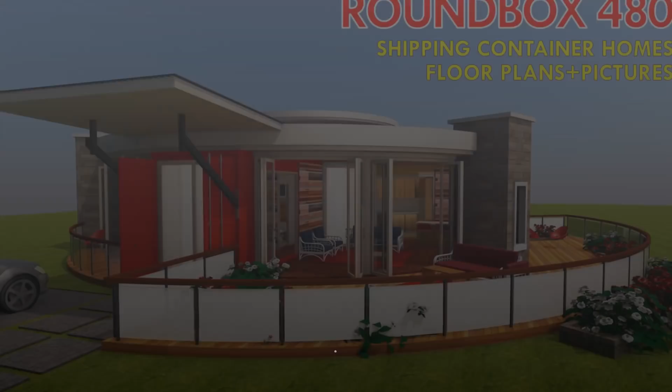This video brings to you Roundbox 480. Stay tuned to find out how a box can be round.

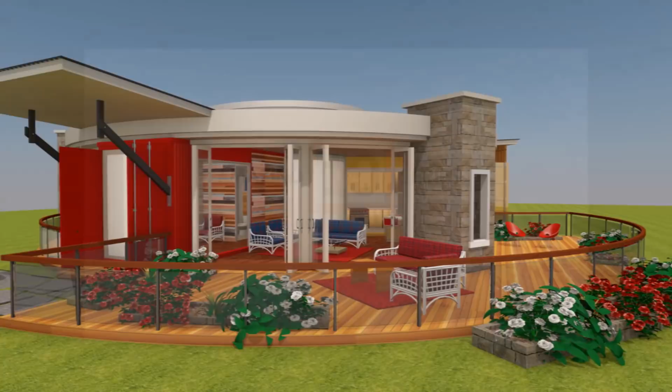Good, welcome back. So, Roundbox 480 is a modern shipping container house designed using three 20-foot shipping containers to create a 480 plus square feet house.

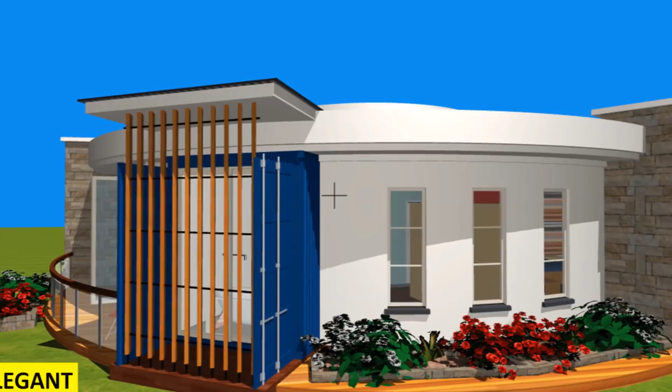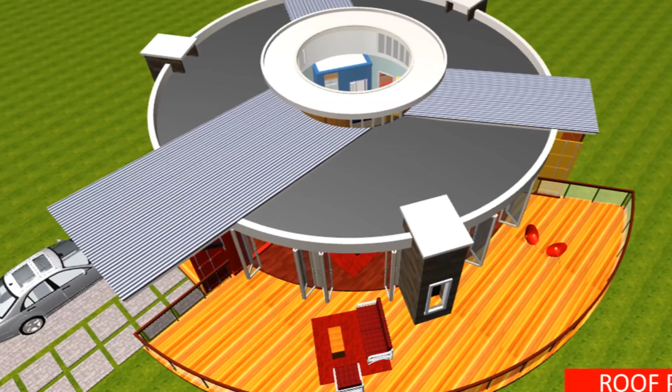So this video covers a complete presentation of dimension drawings, a cost estimate checklist, and 3D floor plans in full color that you can use for your own shipping container house project. Watch to the end of the video for you to be able to have a glimpse at the floor plans with dimensions and also a cost estimate checklist that can guide you in your own shipping container house project.

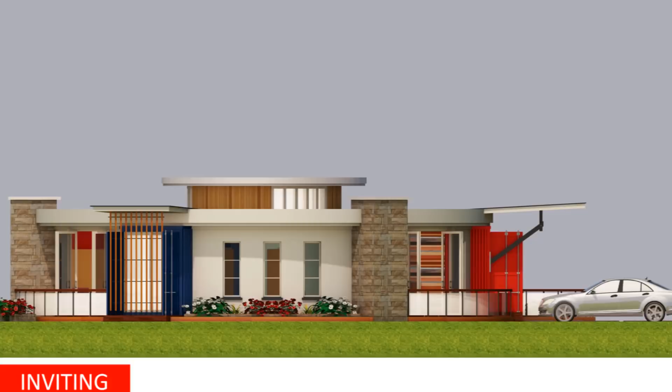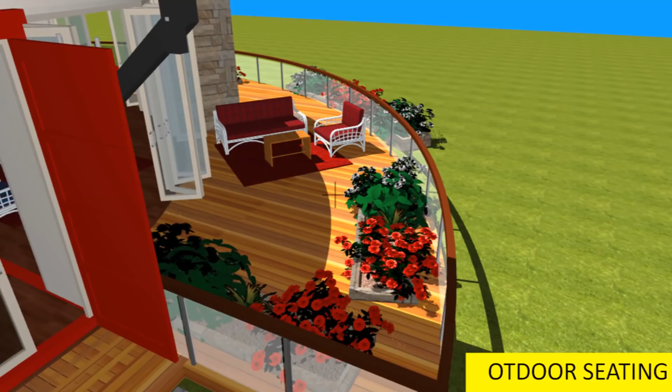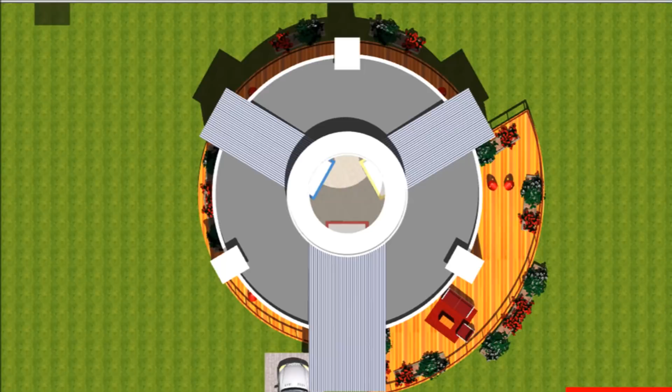So to start us off, we look at the design concept. As I had indicated earlier, this is a shipping container house designed using three 20-foot shipping containers that have been placed at splayed angles and rotated at 60 degrees to create three building blocks for this particular house.

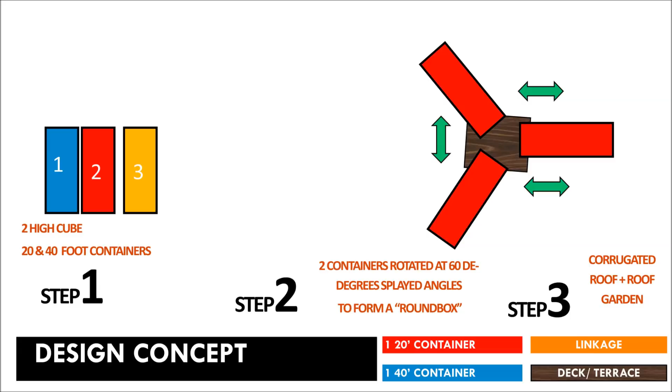Once the three shipping containers are in place, the remaining spaces in the three openings that have been created by this particular arrangement are enclosed with a suitable material to create extra space for the living room and the bedrooms respectively. The shipping containers act as the building blocks for this particular house, and they also act as spaces for the utility functions of the house.

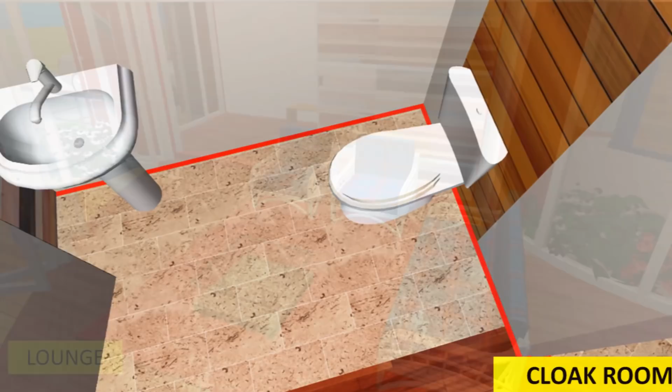So next we move to the design brief. The salient features we managed to accommodate in this particular house include: we have an entrance lobby which is in one of the shipping containers. The same shipping container also accommodates the cloakroom. From there you are able to access the living room. We have the lounge, the dining, and then we have the kitchen, the laundry, and the yard in the second shipping container.

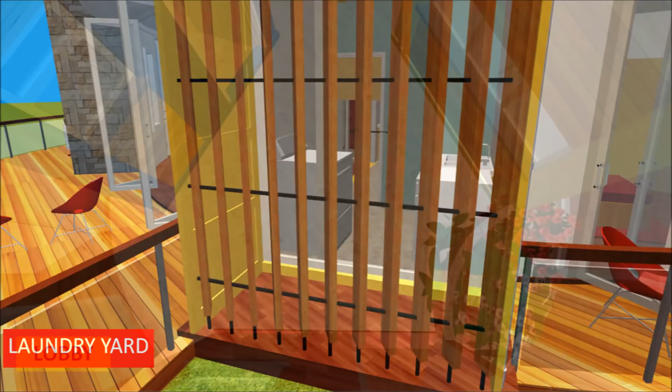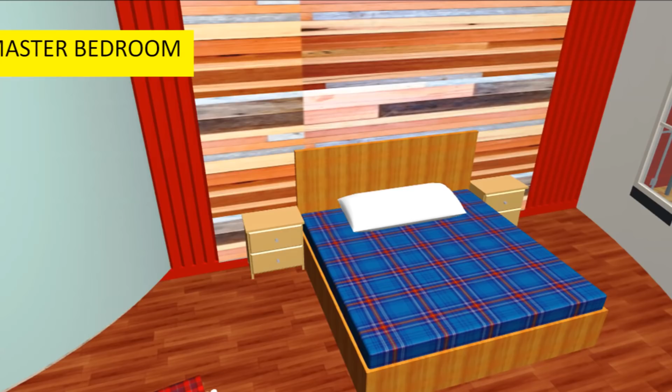From there you are able to access a central lobby, and this is to me the most exciting space in this particular arrangement. From the lobby you are able to access the guest bedroom and the children's bedroom. From there too, you should be able to access the common bathroom that is shared between those two bedrooms. Lastly, you are able to access the master bedroom, which is ensuite with a walk-in closet.

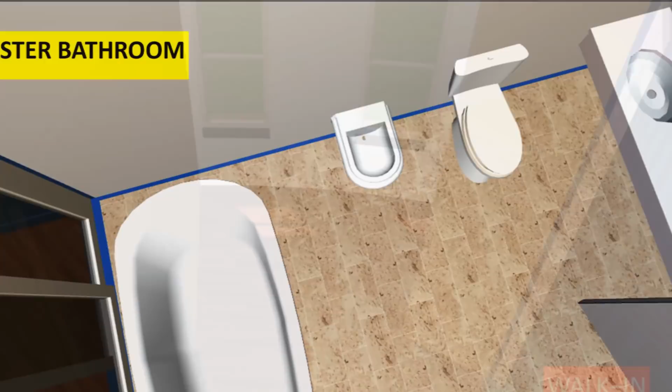So from there you can see that we've managed to accommodate all the utilities in the shipping containers, and the additional spaces around the shipping containers have been carved out to form a round shape, hence the name Roundbox. Otherwise, I know you should be wondering, how can a box be round? So this is basically the genesis of our title of Roundbox 480.

Next, we move to what I would call the foundation design. For this particular house, we've used a raft foundation. This is a foundation whereby you just create a slab and lift it off from the subgrade to keep off surface runoff and also improve drainage around your house, and then you just place the shipping containers on top of that slab once it has cured and dried.

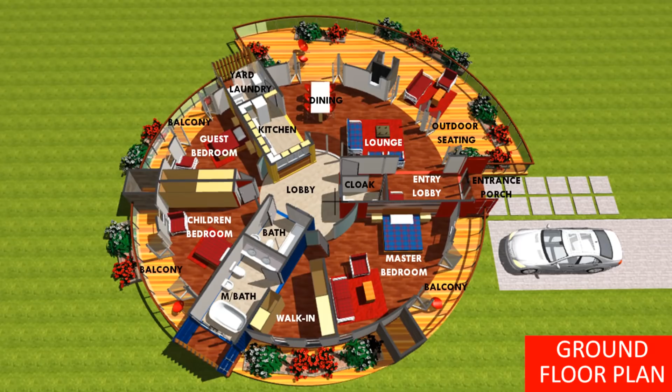Next, we move to what I would call interior design. On the interior design, we've adopted a minimalist interior whereby we use very little furniture as much as possible to avoid cluttering the space with unnecessary items. Try using multifunctional transformative furniture whereby you can have foldable chairs for the dining space, which can also double up as a study space.

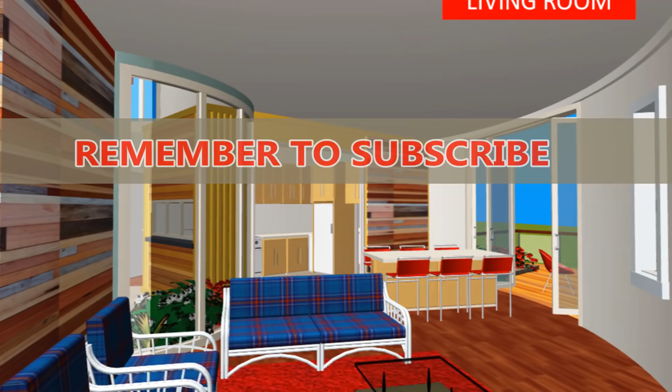You can also have Murphy beds or wall beds for the bedrooms, which can double up as children's playrooms during the day and a bed space at night, or an office space during the day and a bed space at night. Use light colored finishes for the interior walling and also for the ceiling, so that you can create that feel of a big space, despite the fact that the shipping container modules can be constricting owing to their small dimensions.

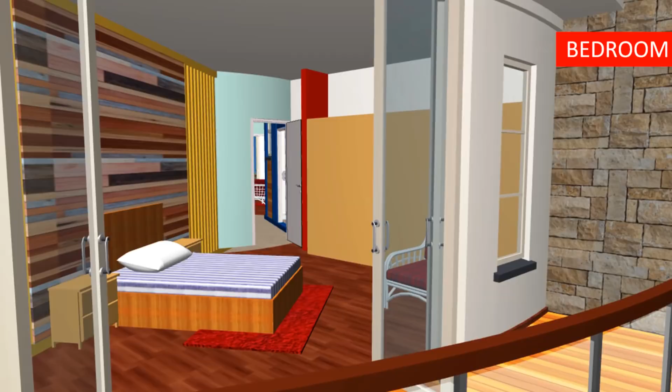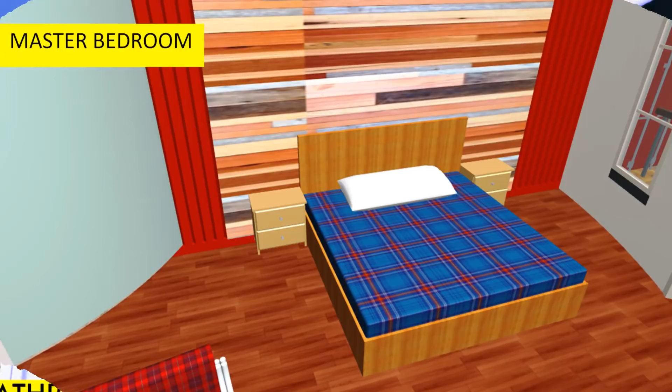You can also use flat pack cabinets for the kitchen and also for the wardrobe. They are good because they save you time, and also they are easy to install. Therefore, they also save you labor costs for your project. Use similar materials for the kitchen backsplash and also for the bathrooms, so that you can tie up all the wet areas and create some harmony and uniformity within the house.

So you can also try out sustainable materials like bamboo for the floor and also for the ceiling, and also in areas where you've done paneling, they can also act as a final finish or cover for that particular space, especially for the walls.

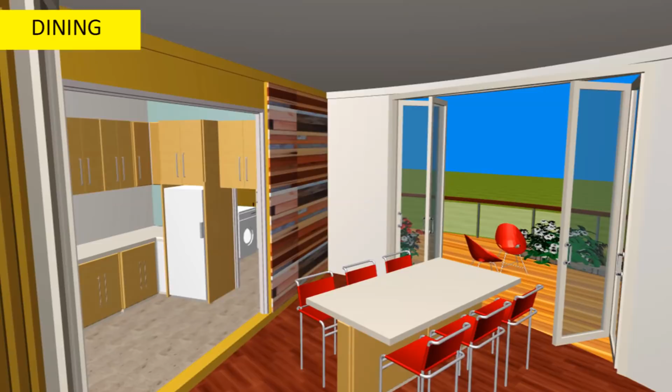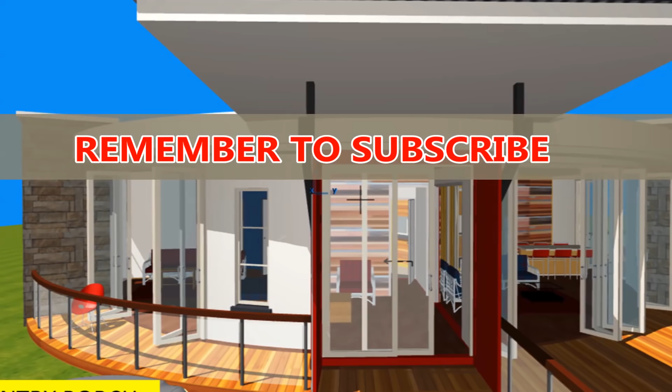You should encourage adequate daylighting so that you can reduce the amount you use for energy in terms of lighting costs. So in this particular design, we've retained all the shipping container end doors, and we've managed to fit them with full height sliding doors, and also we have foldable full height glazed doors for the living room and also for the bedrooms, to enable you to access the balcony spaces and also to adequately light up those spaces.

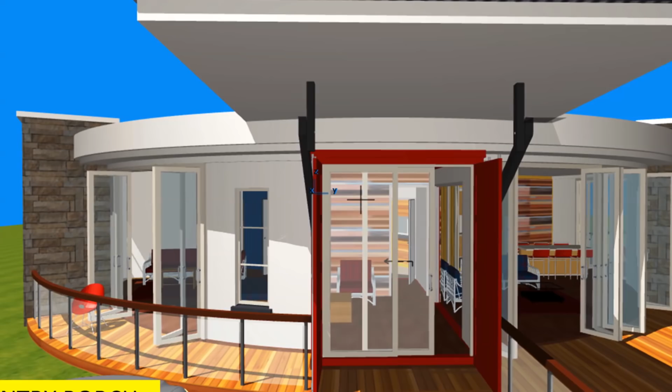Next we move to what I would call structure and modifications. Basically, these containers have almost zero modifications apart from the fenestrations for the bathroom windows and also for the access doors to the wet areas. So these spaces that have been accommodated in these particular containers, as I indicated earlier, are purely utility functions, and therefore you'll find that they have very minimal modification that is required, because by the very nature of their space requirements, they comfortably fit within those particular containers.

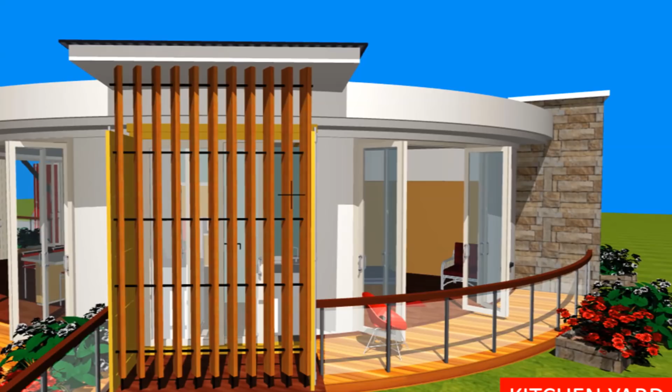The only modification, if you would want to refer to it as such, is that the space around the shipping containers has been carved out in a round form to at least enclose spaces that will complement those spaces that have been accommodated within the shipping container.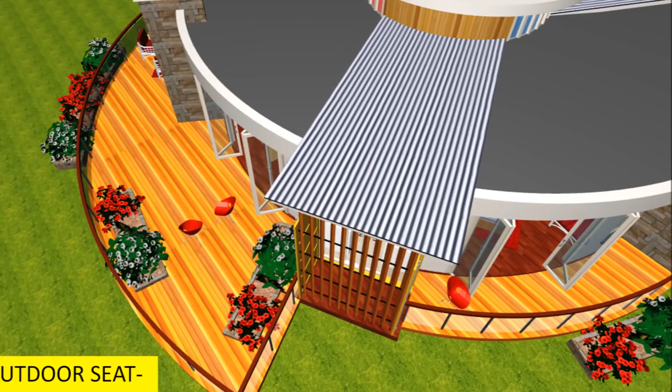On the outdoors and exteriors, the most significant thing you should note in this particular design is that the basic principle for this house was based on rectilinear forms. Those are the three blocks of shipping container steel boxes. But now we've managed to modify the space around them so that you can accommodate a round figure or a round form or a round shape around those three shipping containers.

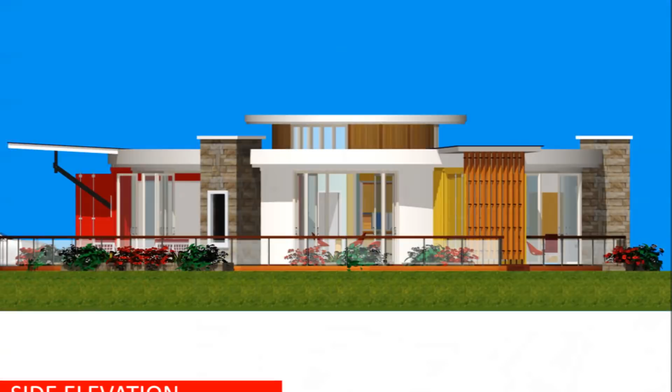Next, we'll look at what I would call insulation and temperature control. The rule of thumb is you should be guided by the climate of where you are building. If you are building in hot climates, you need to keep away heat as much as possible. So that applies to the tropical climate. And if you live in the temperate climate or the cold areas, you need to keep away moisture and dampness from your shipping container, because those two are not very good with steel.

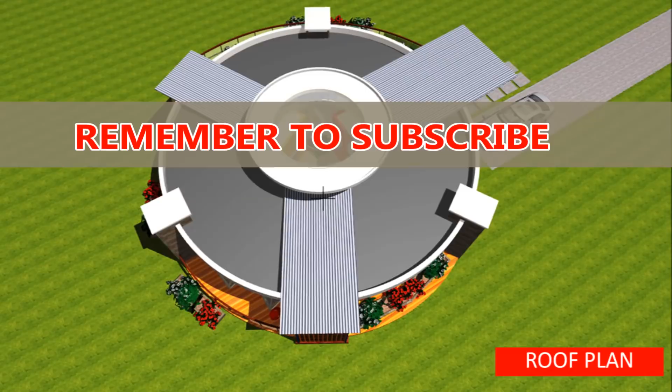If you don't do that, your shipping container house will experience condensation, and also it will form mold, which will be very dangerous for you to have in your shipping container house. So you need to use a spray foam insulation, which will give you a good moisture barrier and also good insulation properties to keep your shipping container comfortable during extreme weather. You need to cover the shipping containers with the corrugated steel roofing as indicated, to protect them from direct solar radiation, so to speak.

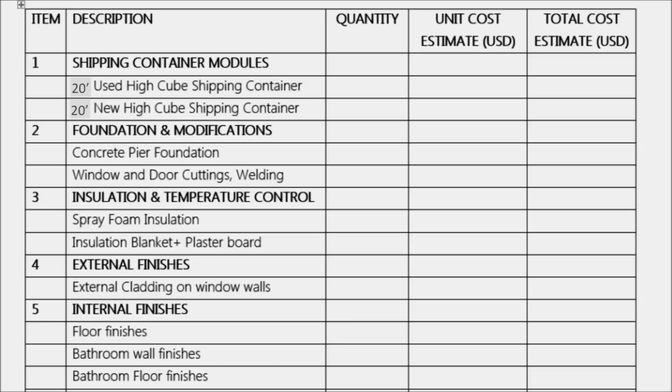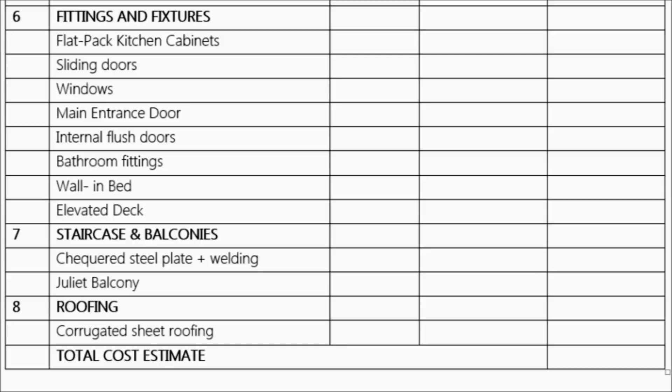So we have a cost estimate checklist, which is just an itemized list of the things you would need to use for your shipping container house. So in this particular instance, have a look at what we've given you. If you find the list is not exhaustive, feel free to add what is missing, and if you find we've over-provided, feel free to also remove and have a complete list that can give you the correct cost estimate for your shipping container house project.